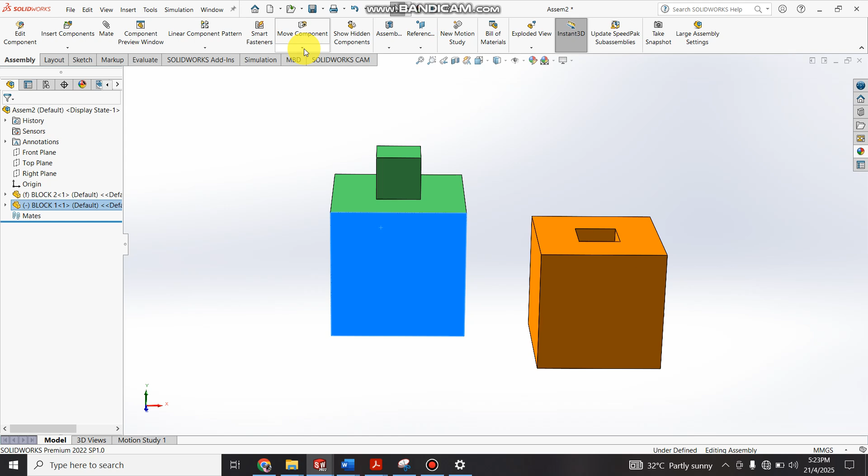I'll be showing everybody how to assemble these two different blocks. If I have something like this, how do I make sure I can insert them like this? How will I make sure this one comes inside of this and they are perfect, looking perfect? First, I assume you've gotten to a level of mastery before coming to assemble.

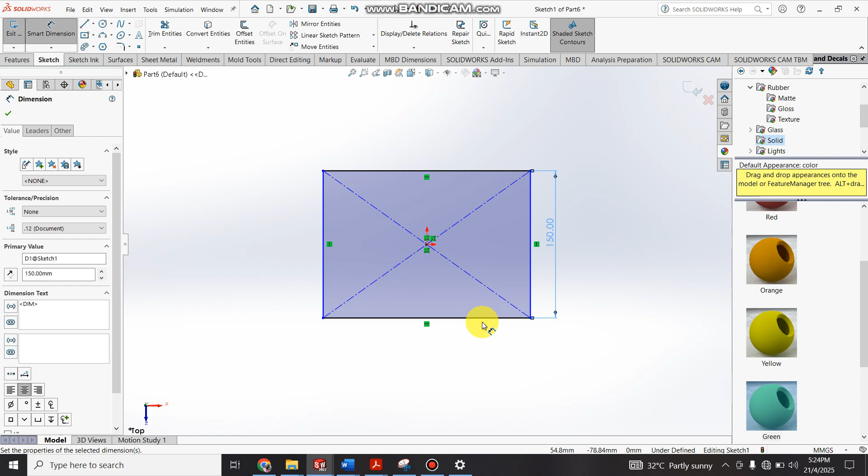I'll start with Control N, Part, OK. I'll use a top plane, sketch, and do a center rectangle. From the center I get something like this. I dimension here 150, then come here and dimension 150. So I've been able to do something like this.

I'll go to features, extrude boss, the top, and use 150. So I've gotten something like this now.

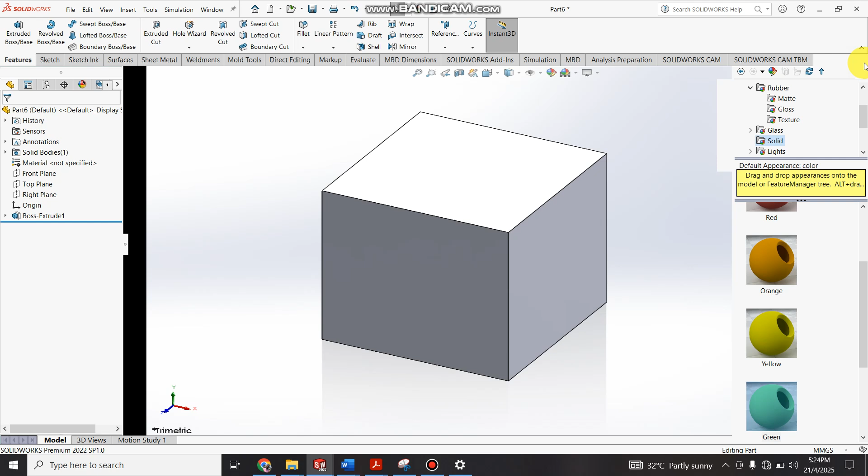Then I come to this part, click on sketch, center rectangle, like this. I dimension here 50, and come here and dimension this 50. I've been able to dimension this.

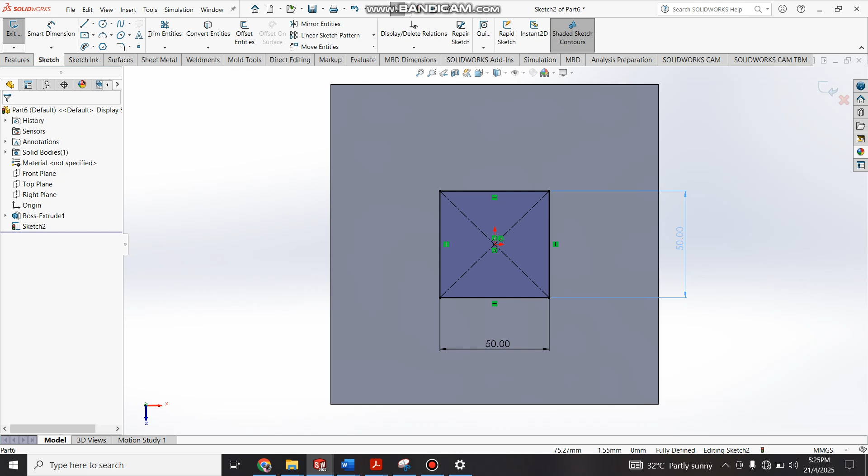Then I come to features, extrude boss, make the length 50 again, check, and I have something like this, as you can see.

Then I go to Control S, save. I choose the location, I say block 11. Since I've done it before, block 11, save. I can come here and add my appearance.

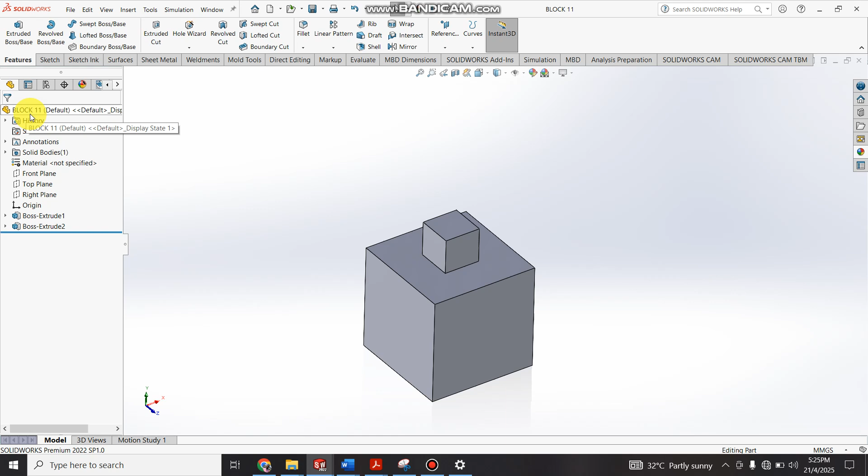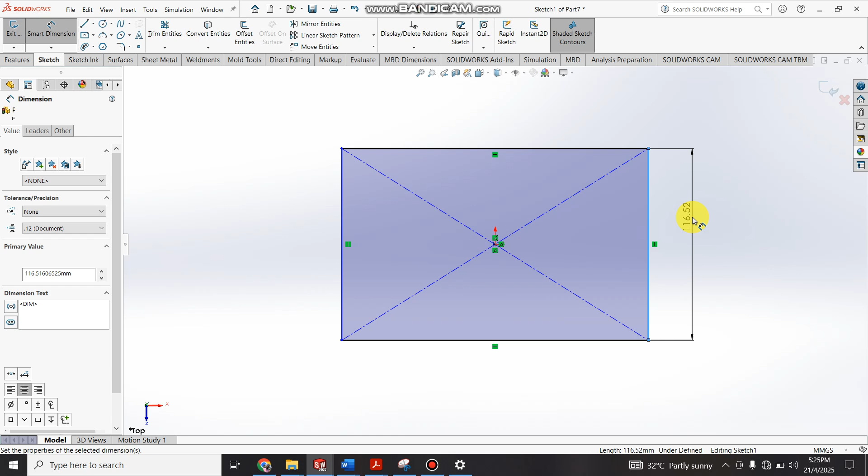Good to go. I go again, Control N on my keyboard, part, OK. Top plane again, sketch, center rectangle. From here I produce something like this. I come to dimension, impose 150, then here 150. I have something like this. I go to features, extrude boss, make the thickness 150 again, and I have something like this.

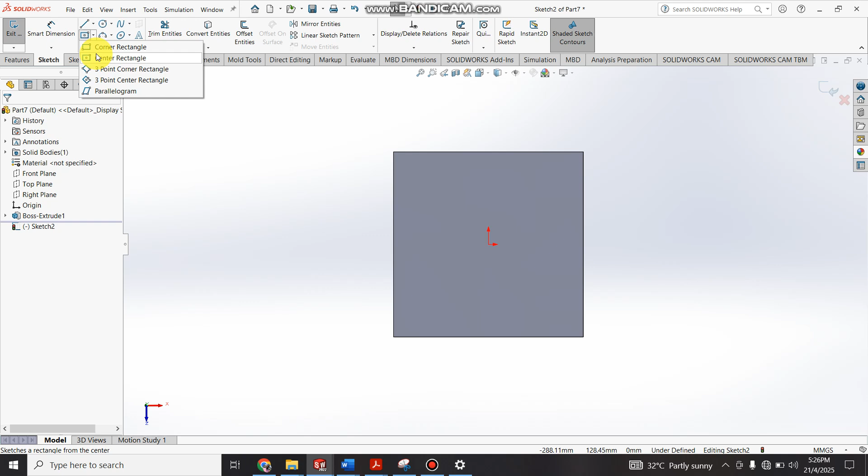So I've been able to do this. I come here, sketch, next thing, center rectangle. From the center I produce this, move to my dimensions. I make it 50 here, and 50 at this point. I have something like this.

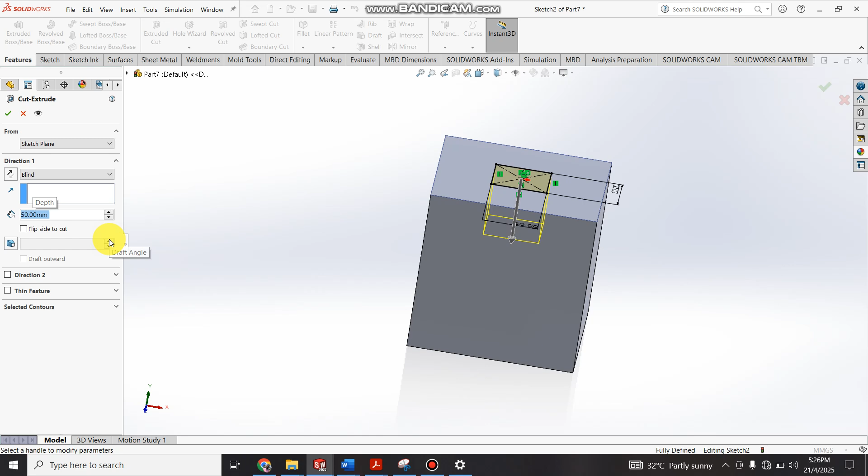I go to features. Before we used extrude boss, now we use extrude cut. I'll make the thickness, the depth, 50. I check, and I have something like this. I come to my appearance again, I'll choose this. So I have something like this.

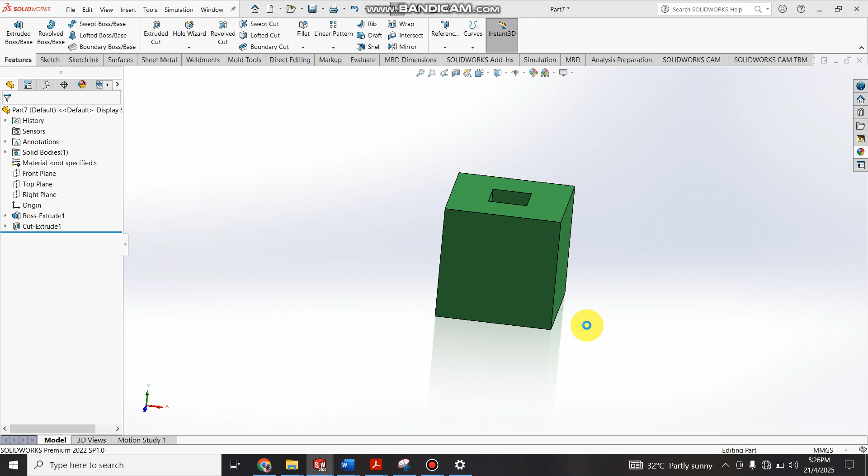I'll say Control S, that is block 22. Save. Since I know the location at which I dropped it, so I have something like this.

I'll click on Control N, assembly, OK. Now I've been able to do the different blocks, so all I have to do is bring them individually. I have block 22, I'll bring block 22 here. It won't move again, I'll just drop it down.

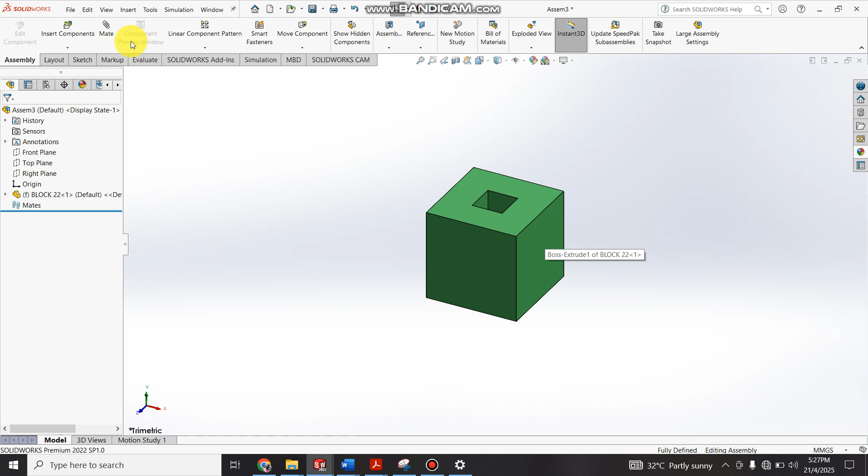Then I go to insert component, meaning you want to bring in another component. So I click on block 11. This is block 11. Whether you bring block 11 first or block 22 doesn't matter, it depends on what you want to achieve. So I've been able to get this.

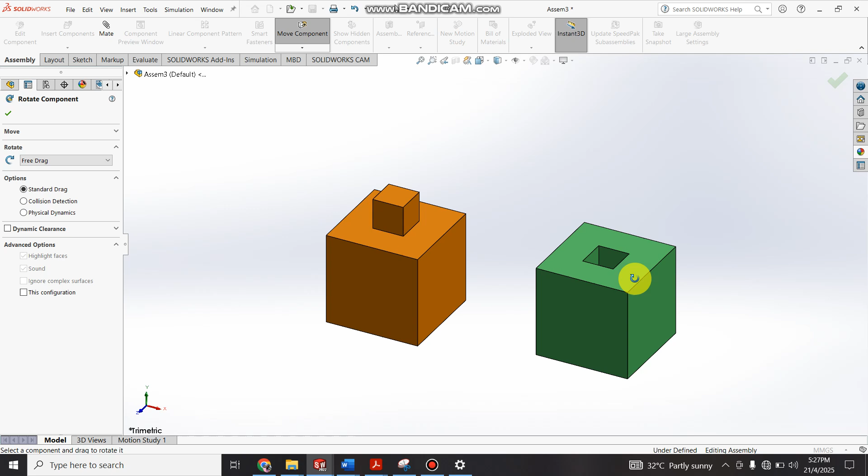Now I want this to be at the top. I'll just click here and click on rotate. It's not going to rotate because it's fixed. So I'll right click and click on float, so I can now move it where this one can be movable. I right click here, click on this, right click and make it fixed. Let it be fixed, so I can't move this no matter how I move it. This now can be moved, as you can see on the screen.

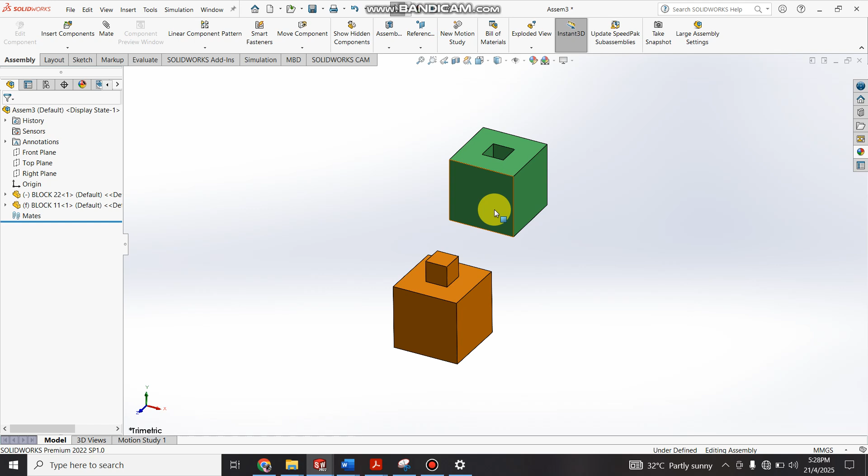So I click here and click on rotate, so you can see I can rotate it now, something like this. I check. Now you can see that they both have a path at which they will follow. We have different types of mate. Hopefully in our advanced videos I'll be showing you the advanced mate.

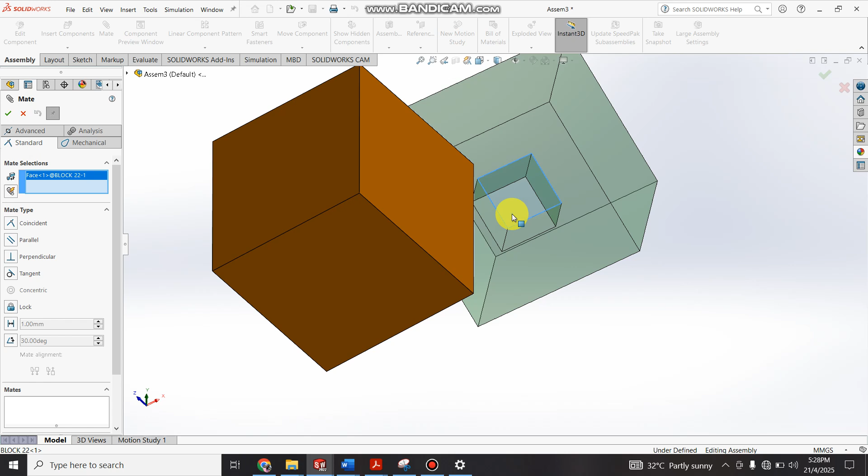For this one I'll just say mate. I click on mate when you want to join two things together. I come here, click here, insert the inside, and click here. Check, you see we have something like this, which makes me able to move it like this.

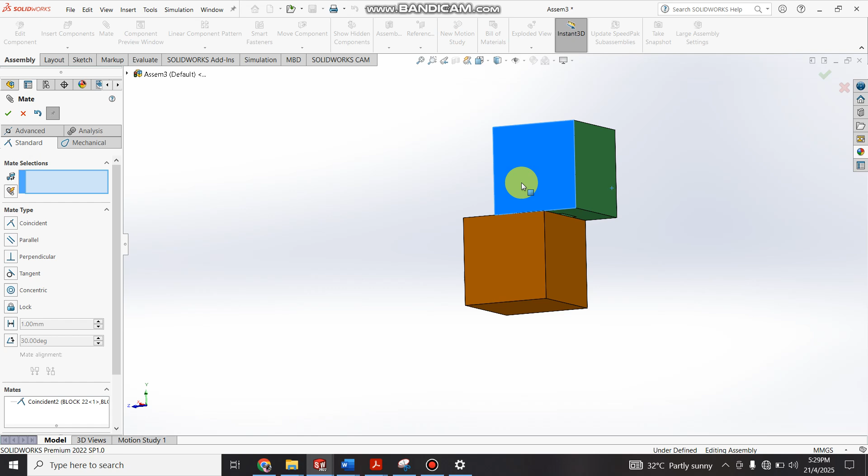Now we can do something again. I click here and click mate, and I'll click here. Check, something like this again. But I'm still trying to see how I can make it. I'll just be moving it, no, that's not an issue.

So what I have to do is mate here. Watch, I click here, click mate, and click here. Doesn't still match. So I'll just say okay, why don't I do something like this? I click on this side and click mate to mate with this side. You see, I got it right again.

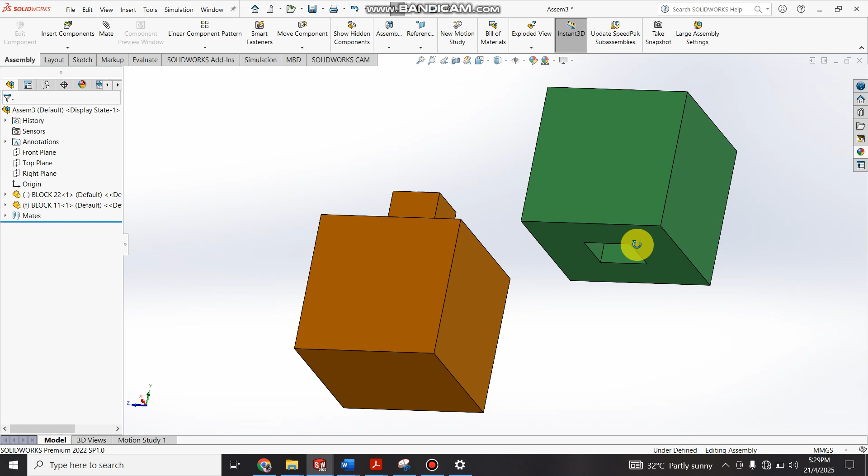So I can say okay, this side mate, because since I know the path it should follow, I click here. So I have something like this. Now I check, you can see that I've been able to do something like this.

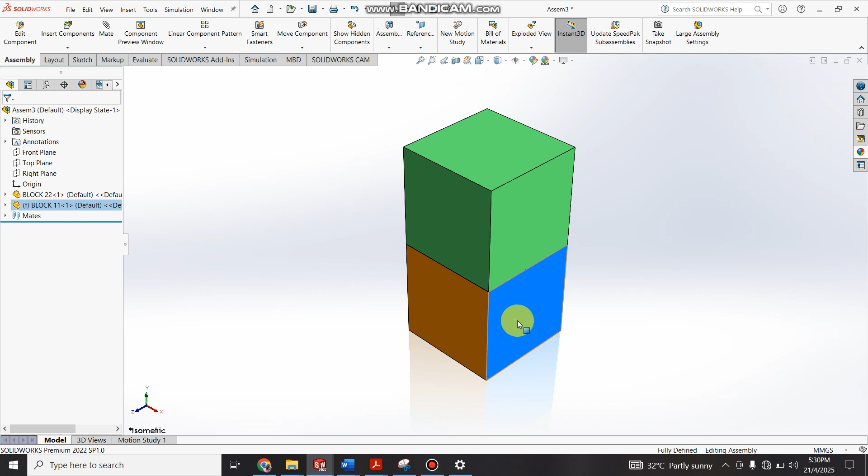I don't need to adjust or anything, it cannot be moved. So if I'm moving it, they are all fixed structures, except if I want to right click on it and say I want it to be floating. I can now move all of them together, as you can see.

So please see how you can practice this. It's very simple.